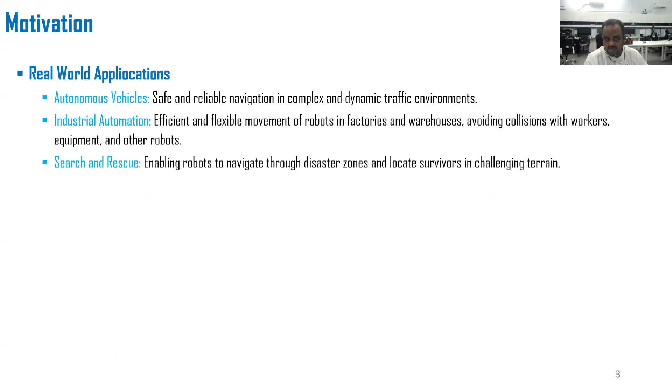So why do we need safety in robotics? In real-world applications, autonomous vehicles work in complex and dynamic traffic environments, so safety and reliability should be ensured in order to ensure mission success. Then comes industrial automation, where robots work in factories and warehouses. Then search and rescue, where we use ground, aerial, or underwater robots to navigate through disaster zones, gather information, and locate survivors. Finally, exploration and surveillance, where drones and robots are used to explore unknown areas, such as underwater or in space.

So what do we mean by safety in our work? Particularly, when we talk about safety, we want to refer to it as preventing collisions with humans, objects, or other robots. To ensure safe operation in various environments, we need certain policies and protocols built into the robot's computer system. This is needed to increase efficiency, so the robot can navigate smoothly without getting stuck or colliding with objects, and also to optimize robot paths for time and energy efficiency.

So even without this slide, it's not very difficult to understand that robot obstacle avoidance is very crucial for enabling robots to operate safely and effectively in real-world scenarios.

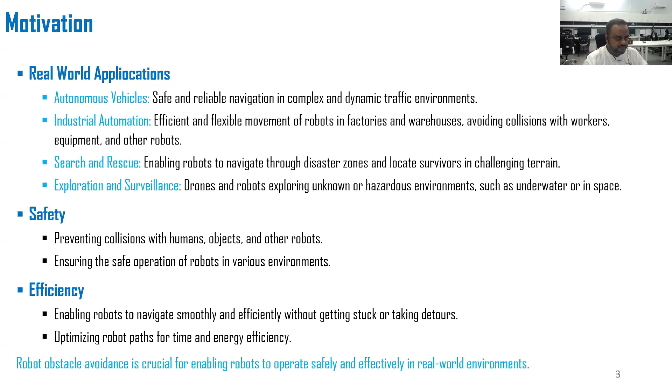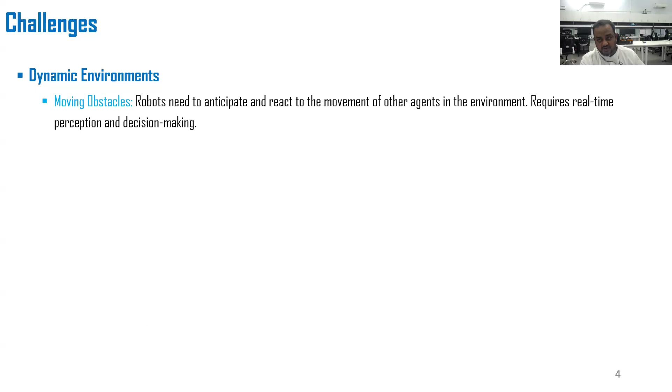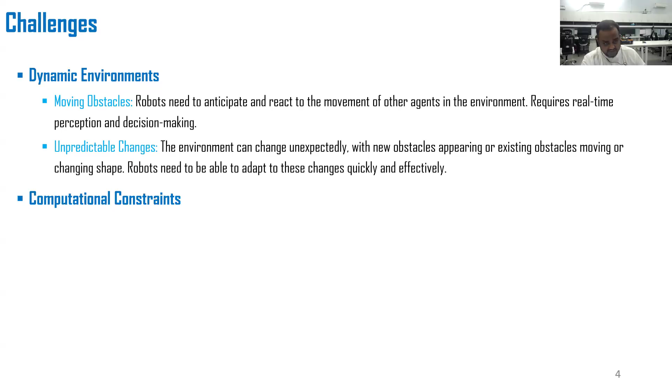When we talk about obstacle avoidance or safety in our work, there are certain challenges, like dynamic environments, where we get moving obstacles and we don't always know how they're moving. There are unpredictable changes in scenarios, like robots becoming rogue, moving quickly and unpredictably. There are computational constraints, where real-time processing is important and the robot should have sufficient computational resources onboard. Other challenges are uncertain and complex environments, varying obstacle shapes and sizes, sensor failures, or other unexpected events.

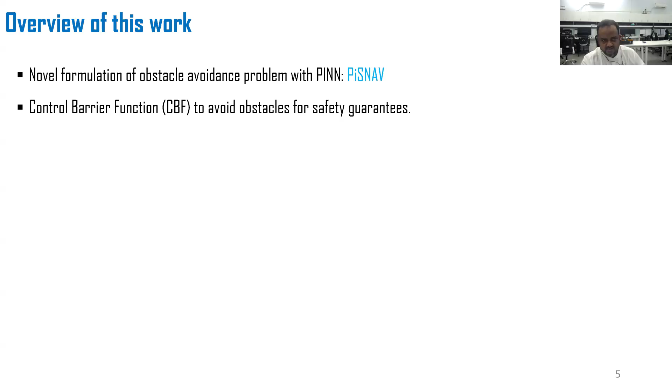So to summarize and address these challenges in this work, we talk about a novel formulation of the obstacle avoidance problem with physics-informed neural networks, which we call the PiSNAV algorithm. We use control barrier functions to avoid obstacles for safety guarantees. A control barrier function is a mathematical policy which can guarantee safety in certain environments, so we use that advantage.

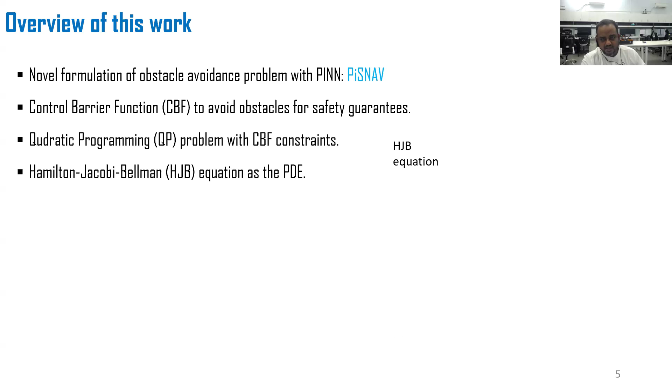When we talk about control barrier functions, quadratic programming comes into picture, where the control barrier function forms the constraints in the optimization. Then we convert the quadratic programming problem into the Hamilton-Jacobi-Bellman equation, which is actually a partial differential equation. This Hamilton-Jacobi equation is solved by the PiSNAV algorithm, and it gives the optimal maneuvering input to the autonomous vehicle. So in a bigger picture, if we see the autonomous vehicle system, it is something like this.

It has some actuators, some sensors. Sensors are like lidar, radar, sonar, etc., which can sense whether there is any object or obstacle in the environment. The sensor tells the decision-making system, flight controller, or robot controller unit whether there is a potential obstacle or not. If there is no obstacle, we use a proportional integral derivative controller so the robot can track the predefined trajectory or path and reach the goal. If there is an obstacle, we use the PiSNAV algorithm, and accordingly the control input is generated, which tells the actuator like propellers, motors, control surfaces to act so the autonomous vehicle can take an optimal and efficient maneuver.

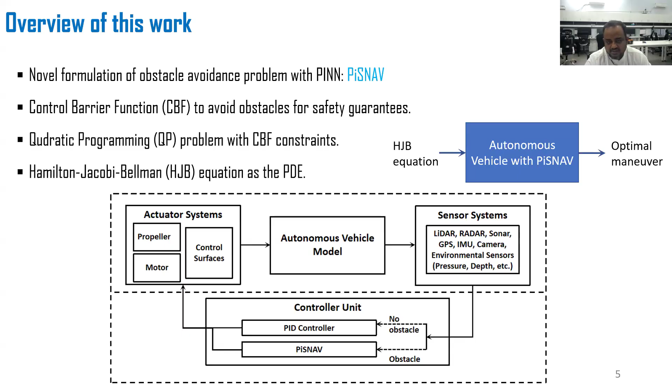To sense whether there is any obstacle or object in the system and to have perception about it, we can't deny the importance of sensors. So robots need to accurately perceive their environment, whether there are obstacles, and whether they are static or dynamic. The quality of obstacle avoidance depends heavily on the quality of the sensor data.

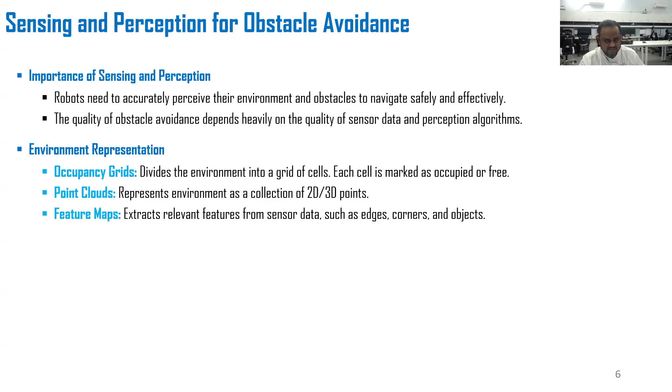The environment representation should be good enough for the robot. There are occupancy grids, where the environment is divided into different grid cells, each marked as occupied or free. There are point clouds, where we get the representation of the environment as a collection of 2D or 3D points. And there are feature maps, which extract relevant features from the sensor data, such as edges, corners, objects, etc. These are some representative figures where you can see the real world environment, which is a maze-like scenario, extracted as a feature map like this, an occupancy grid map like this, and this is a point cloud representation of some object or obstacle.

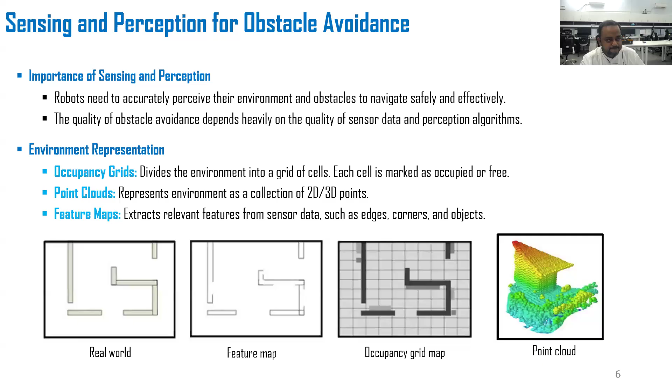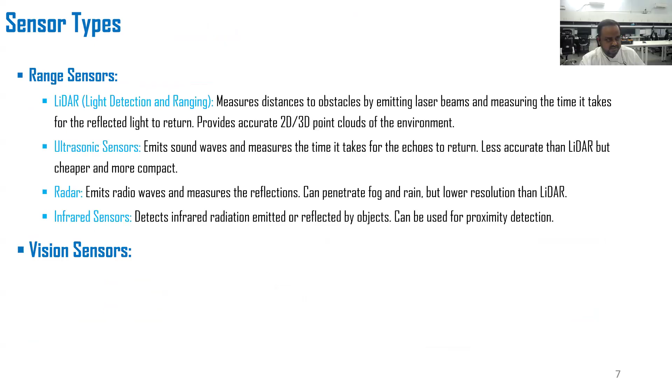There are different types of sensors used in our work. One is range sensors, with variations like lidar, ultrasonic sensors, radar, infrared sensors. Then there are vision-based sensors like camera, depth cameras, and stereo cameras. With these, the first part of the problem is solved - sensing the object or obstacle and having perception about it.

After that, there is decision making. So what is safety in our work? As I told, safety is collision avoidance or obstacle avoidance, a critical aspect of safety in robotics and unmanned systems that is always in discussion. It involves a combination of sensing, perception, planning, and then control.

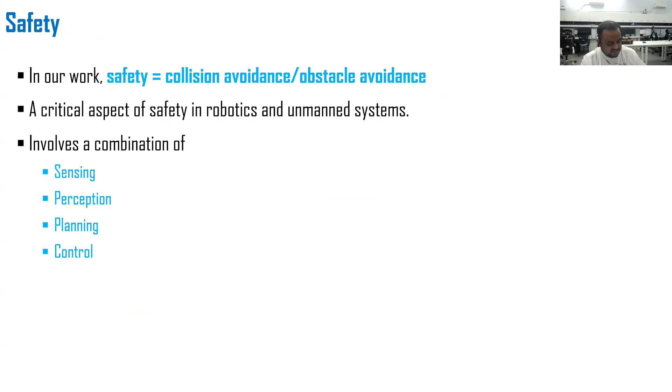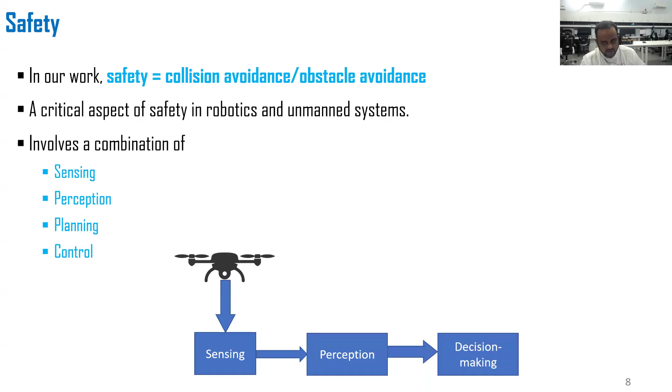When we want to see the picture in a schematic fashion, this is the vehicle which has a sensor built in, or added to the system. When it senses the object, there is a perception unit, then a decision-making block which decides whether we should consider it as a potential obstacle or not. If there is an obstacle, there is a chance of collision, so that should be eliminated. Then the flight controller decides how the control policy of the particular autonomous vehicle should be designed, after which the control and stabilization aspects are taken care of.

Then all these control input strategies go to the actuation block, and finally the actuation units, like the propellers, function in a specific way so the drone can take a specific turn to avoid the obstacles present in the environment. It can be static, it can be dynamic, and also it can be some other drones or robots in the environment.

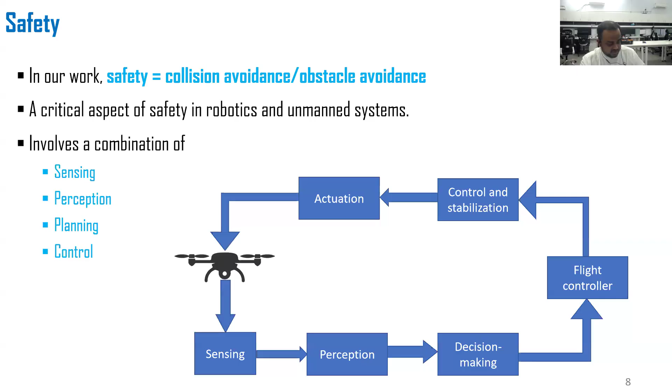As I told, control barrier function is the algorithm we are using for obstacle avoidance. It is a function that controls the autonomous vehicle's safety by defining barriers. The barrier divides safety such that it separates regions into safe and unsafe regions for the autonomous vehicle. I'll give one example.

Just assume you are flying kites on the terrace. What is the safe region and what is the unsafe region? The safe region is on the terrace, and if suddenly, without being mindful, you fall down from the terrace, then it becomes unsafe. So what is the barrier? The barrier is the parapet wall, which tells that inside that parapet wall, the region is safe for the kid flying the kite, and outside the barrier or parapet wall, it is unsafe. This is the basic concept of control barrier function.

In robotics, when we talk about the unsafe region, that is the obstacle or other autonomous vehicles, and when it is the safe region, it is the area excluding the obstacles. That means when a drone is flying in the environment and there is a building, then the building is the unsafe region for the drone.

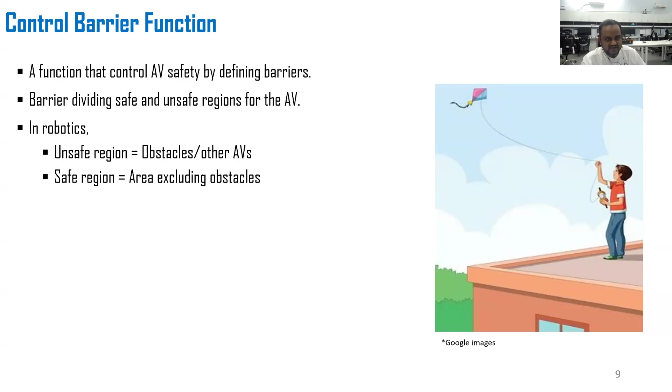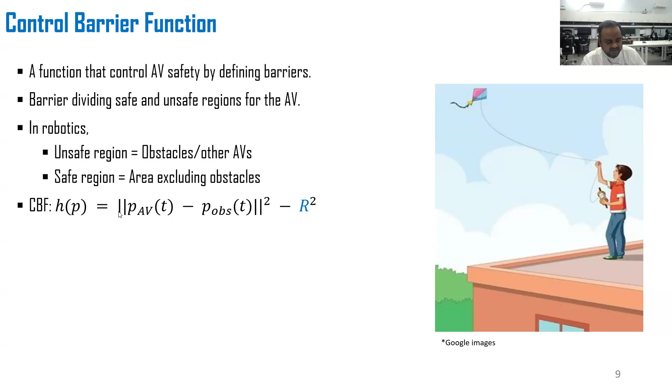Outside the building, whatever free space is available is the safe region for the drone. Control barrier function is a function depending on the states of the vehicle. It can be defined in different terms, but here we are defining it in terms of distance. What is happening here?

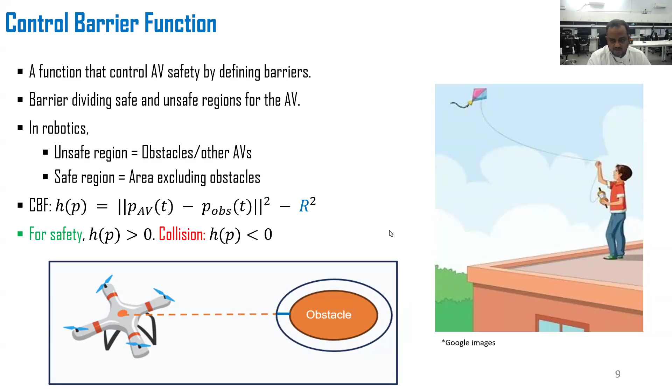To see a pictorial view of how the control barrier function will be decided in case of robotics, it is something like this. The drone comes into the environment and encounters one no-fly zone, obstacle, or unsafe set. Through its sensor, it maps the points on the boundary of the unsafe set.

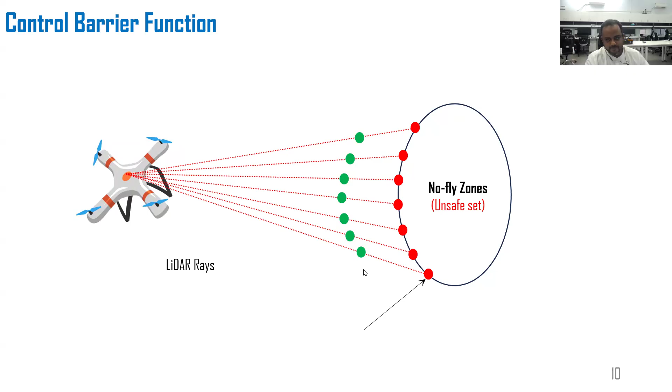Now the drone itself has a turning capability. It can't come very close to the red points and then start turning, because that will not be a successful maneuver and collision will happen. So based on the turning capability of the drone, there will be some safe points which form a kind of locus in the system, and we can say the drone should not cross these points. If it crosses these points, then even though it is aware of the presence of the obstacle, it will not be able to turn sufficiently to avoid it.

So these are some safe sample points we talk about. Till this point it is safe to maneuver without collision, and unsafe beyond this. Assume that these are the LiDAR rays, and these are the unsafe sample points, as I have told. Coming to this particular point is, of course, the collision, but depending on the physical dimension of the drone and its turning capability, it is also mandatory that the drone doesn't cross these safety points.

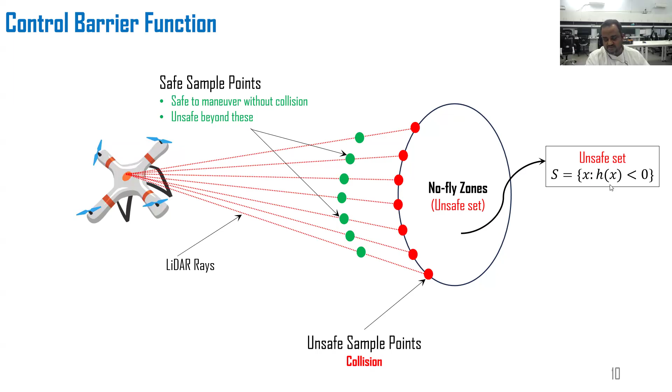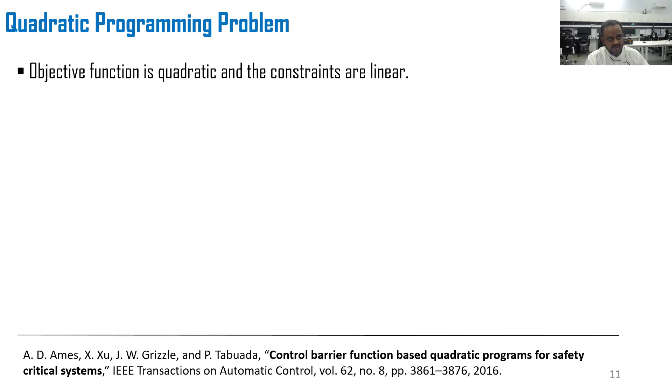So this no-fly zone or unsafe zone is characterized by the control barrier function, which becomes negative. Now, when we have the control barrier function in hand, the way problems are generally solved in robotics is that we use the control barrier function to create a constraint, and that constraint serves as a constraint in an optimization problem, which is a quadratic programming problem. For a quadratic programming problem, the objective function is quadratic and the constraints should be linear.

So in general, energy consumption optimization is considered, and an energy minimization problem for obstacle avoidance is considered here. The objective function is to minimize the energy, subject to the state equation of the system, or the autonomous vehicle, drone, or robot—I can use these terms interchangeably. And this particular constraint is the control barrier function based constraint.

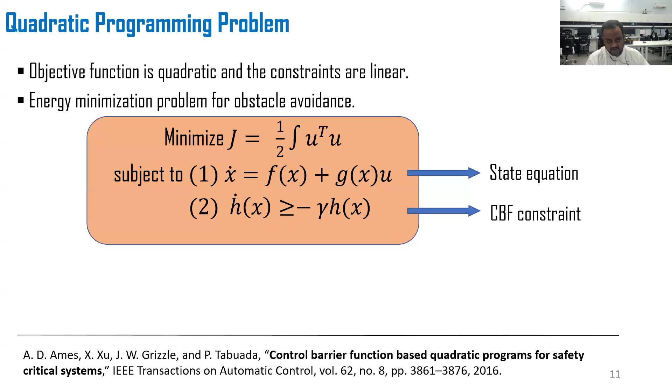So we need to solve this particular quadratic programming problem. We get U, which is the control input, that minimizes this objective function. And in order to maneuver in a minimum energy consumption way, that particular U should be utilized by the autonomous vehicle. X is the state vector, U is the input vector, and the control barrier function is already defined in the previous slides—based on distance. There can be angle-based control barrier functions also, but we are not considering those here.

The concept of control barrier function and quadratic programming problem, to solve that, was first conceptualized in this particular paper, 2016, by Ames.

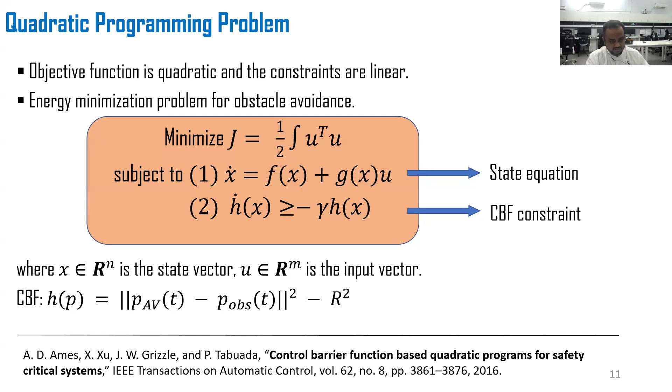Okay, up to this point, the problem is straightforward. We know there are obstacles in the environment, and we use control barrier functions to create constraints.

These constraints enable the drone to obey the safe and unsafe regions and boundaries. But after that, what we do in our work is convert this optimization problem into a Hamilton-Jacobi-Bellman equation, which is essentially a partial differential equation. Why do we do that? What's the advantage? It will be clear in later slides.

The Hamilton-Jacobi-Bellman equation is a PDE. It plays a central role in optimal control theory, providing necessary and sufficient conditions for optimality in continuous time dynamic systems. It helps find the best control strategy to minimize something—for our case, it is the energy.

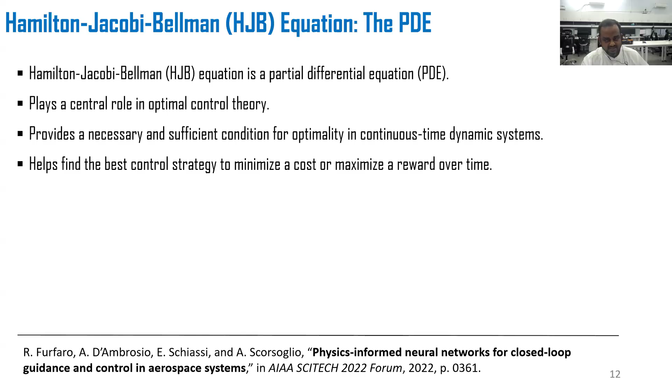When we break down the problem, we first get the optimal control problem from the previous slide's optimization problem. Then there is a value function involved. Out of that, we formulate the Hamilton-Jacobi-Bellman equation, and then we solve it using a physics-informed neural network.

Solving the optimal control problem with the Hamilton-Jacobi-Bellman equation and then with a physics-informed neural network was first conceptualized in this paper, which discussed optimal control systems, closed loop guidance, and control in aerospace systems using PINNs.

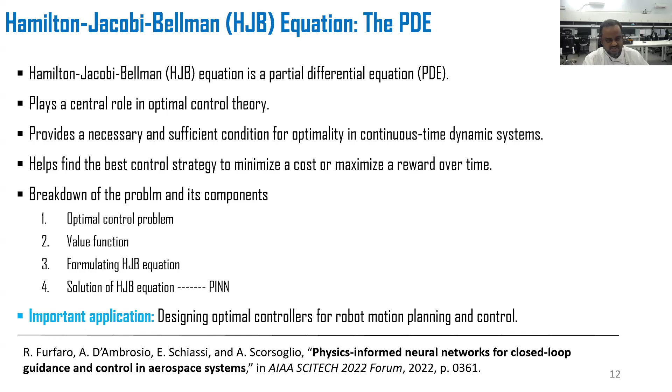The important application becomes designing optimal controllers for robot motion planning and control. We use this idea to convert the optimization problem into something solvable by physics-informed neural networks. There are lots of advantages which I'll show in the result section.

So what is our Hamilton-Jacobi-Bellman equation? The mathematical formulation is given in this particular paper by us. I won't go into detailed derivation, but I'll show the flow of how the problem is formulated. First we have the system equation—the dynamic or kinematic equation of the autonomous vehicle.

Then we have the control barrier function, and a control barrier function based constraint, which is standard and given in the ARTPARK paper. With all these, we get the quadratic programming problem. If we just solve this quadratic programming problem with some solver, we get the optimal control input U which minimizes the objective function.

But what we are doing here is defining a value function. Based on that, we get a Hamilton-Jacobi-Bellman equation, and finally we solve it for the optimal control input and get a final PDE for a point mass model.

We started with a point mass model to gain confidence in the algorithm, and then we started increasing the complexity of the model. So here, what we get as the final PDE is for a point mass model.

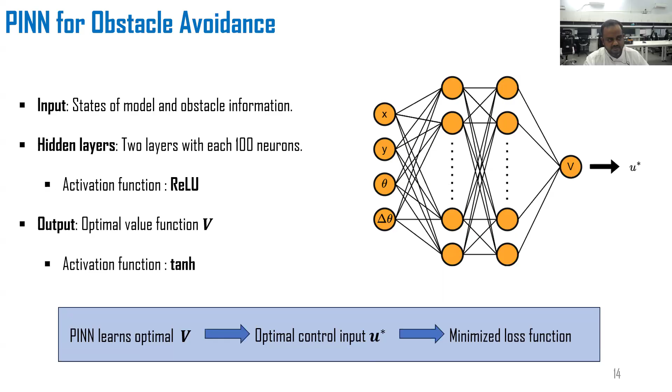So the obstacle is avoided. Also, if there's a probable collision with dynamic objects like a human being or something similar, that can also be avoided. Okay, so how do we train the model?

The goal of Latin hypercube sampling is to ensure the samples represent the full range of the input variable—meaning it doesn't give importance to certain portions while missing other areas. This is how the collocation points are generated.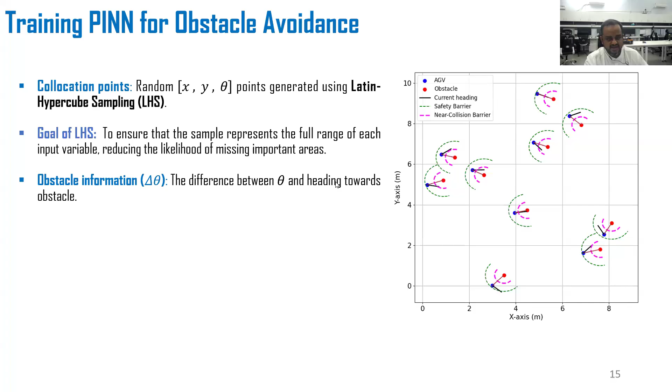Then the obstacle information is given in the difference between theta and the heading towards the obstacle. And if I generate one particular scenario to show how things are obeyed, it is something like this.

The autonomous vehicle is in an unsafe region because it has crossed the safety radius somehow, because of its high linear velocity or limited turning capability. So somehow it has crossed the particular safety barrier and gone inside that, but it should not cross the pink barrier, which is the near collision barrier. These two barriers depend on the dimension of the autonomous vehicle.

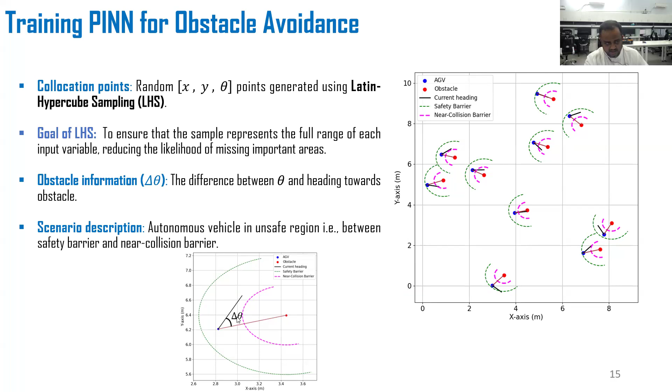And when you see this, this red line is the heading towards the particular obstacle, which should be avoided. So this del theta should increase. In this way, the network is trained.

The loss function is the PDE, which is to be solved. We train the network for 8,000 epochs, with a learning rate of 2e minus 4, and we use the Adam optimizer. After training, we see that the network is learning the policies sufficiently and the loss is coming down.

So with this particular model and some confidence with the point mass model, with the mathematical formulation of the Hamilton-Jacobi-Bellman equation, then getting the PDE, then training the network and getting the loss converging, we go for testing the results.

Can I ask a question, Rudrash? Sure, sir. It seems that you have the constraints. These are sort of soft constraints, like penalties. You didn't need to go to harder enforcement like augmented Lagrangian or similar.

So, sir, it was not required in enforcing that, but when we formulated the Hamilton-Jacobi-Bellman equation, we have a Lagrange multiplier, and based on that, the PDE is formulated. But we are not enforcing any condition based on that.

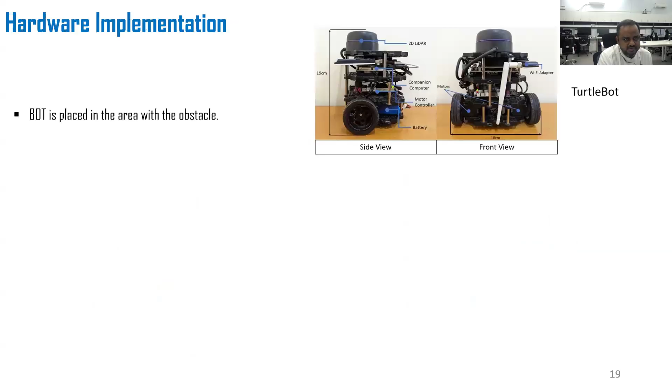So the bot is placed in the area with the obstacle. The obstacle should be on the path of the TurtleBot. The companion computer reads the LiDAR data, and then obstacle distance, obstacle coordinates, all these things are obtained.

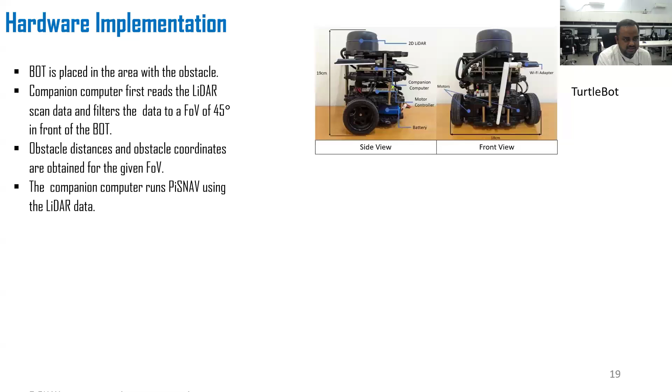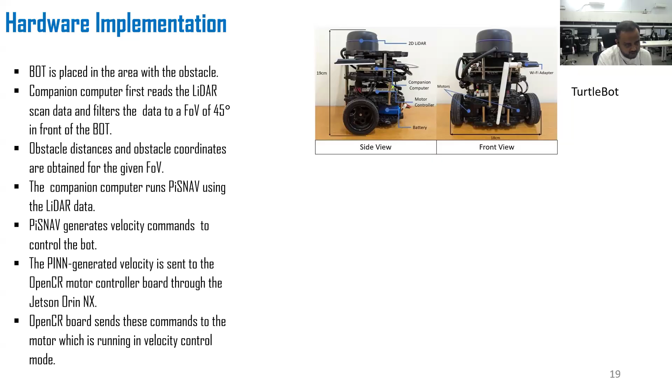Then the PiSNAV algorithm uses the LiDAR data. PiSNAV generates the velocity commands to control the bot, that is the U star. Then the PiSNAV generated velocity is sent to the controller. Based on that, the command goes to the motor, which is the actuator, and then finally the maneuver takes place.

So you can see there is a single obstacle scenario where the robot was moving in a straight line and suddenly it encounters an obstacle and then maneuvers. Then this is a multi-obstacle scenario. In this particular scenario, we don't have any proper goal location, it is just exploring and avoiding the obstacles, and that is what is expected from the vehicle.

Then finally, we tested one random obstacle scenario where we drop the obstacle in front of the moving bot, and it stops and starts changing its heading.

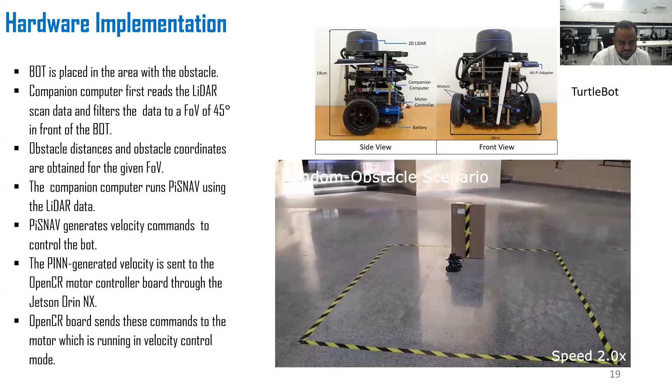So when we talk about ground vehicles, we have the motion of the vehicle in the X and Y coordinate. But after formulating the first problem in a point mass system, we wanted to see what happens if there is a movement in the vertical direction.

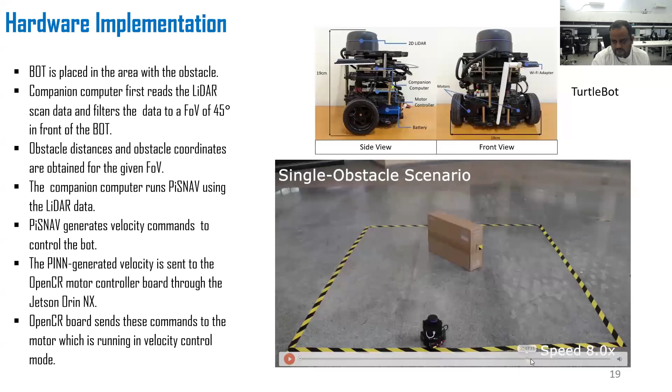Yes, excuse me, can I ask a question? I'm Kamal from Brown. In the previous slide, when you put an additional obstacle in a dynamic way, does it check the minimum distance to travel or the minimum time? Is it the last case? Yeah, last case. Please ask me the question once again.

So is it checking what will be the minimum distance to travel, or the minimum time to reach the destination? For this particular scenario, the dimensions are such that when it is dropped, it is sufficiently far. I'll show you other simulations where if the velocity of the obstacle is too high, there are certain problems. This is common in robotic environments, because if the obstacle's velocity is very high or it comes in very close vicinity, the turning capability of the robot might not be sufficient and collision might happen. But that is a special case.

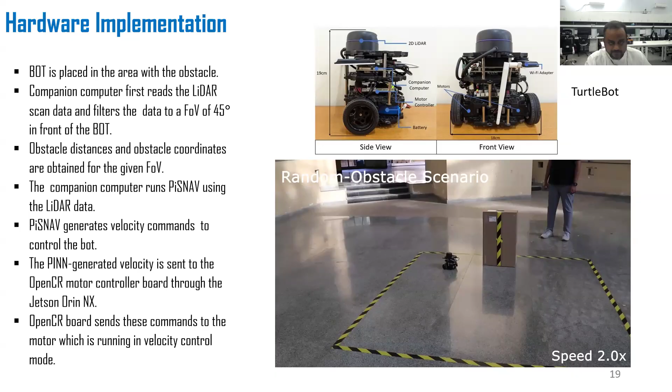But in the next scenario, for other things like when we have to track one predefined trajectory, then we need another additional controller, that is PID control. So that effect will be seen in this particular results experiment.

So here we take underwater vehicles, and this is also just a numerical simulation. The AUV explores the maritime environment in the heave motion, that is vertical motion. In the absence of obstacles, depth is controlled using a conventional PID controller. But when avoidance should be done, onboard sensors tell the vehicle controller that there are obstacles in picture and it should be avoided. To avoid the obstacles, it will deviate from the intended path with the help of the PiSNAV algorithm. You can see in the first figure the underwater vehicle starts from this particular starting position.

The mission it needs to conduct is to come down to a certain depth and then monitor the area, that is the plan. There is a predefined trajectory, the red one, the reference trajectory, and PID control helps the vehicle come down, follow the trajectory, and move in a particular fashion. But at this point there is one obstacle, so PiSNAV comes into picture. The PINN trajectory is this green one. By doing this it avoids the particular obstacle, then comes back to the PID trajectory, the reference trajectory, and tracks it again by the PID controller. So it is a kind of switching control between PiSNAV and PID control.

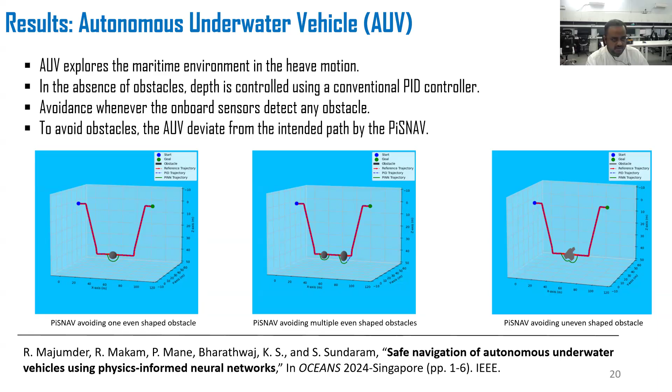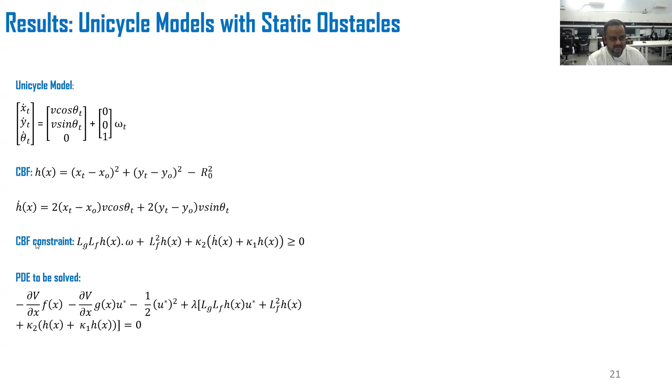So we came back to the ground vehicle and made the vehicle model a bit more complicated than the point mass model. Now we check results with unicycle models. This is the equation, this is the control barrier function I mentioned earlier. Then the CBF constraint is formulated, and finally we formulate the PDE to be solved, and in the environment we keep multiple obstacles.

So this is a ground vehicle simulation where the vehicle starts from this blue point, and this is the goal location. Now we have the goal and we want to send the vehicle from the starting location to this point, somewhere in this region it should reach. Not for all obstacles have I shown the barrier, because that makes the figure cluttered. So for this particular obstacle, this is the safety barrier, and then we have one near collision area.

When we see the dotted lines, these dotted lines are PID control, because starting from here it needs to follow a reference trajectory and reach the goal location. But when it encounters the obstacles, it starts deviating using PiSNAV. This deviation happens whenever it encounters any obstacles. Finally, when there are no obstacles in the environment, like in the LiDAR data, when it sees that no point clouds are seen for the obstacles, then it switches back to the PID trajectory and reaches the goal point.

Okay, so this is the unicycle model with the PiSNAV algorithm for static obstacles.

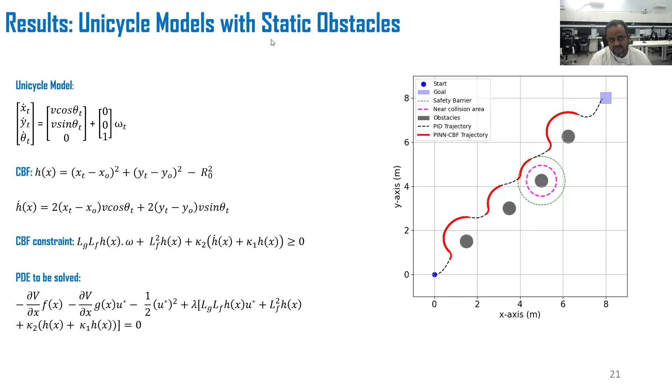Then we show the results of the unicycle model with dynamic obstacles, which is another level of complication. What we do here: we set the vehicle velocity as 1 meter per second, obstacle velocity as 0.5 meter per second, obstacle radius as 1 meter, and this is the barrier radius.

So the first figure shows the vehicle trajectory. Let me tell you that obstacle 1 is moving in a simple harmonic motion, so the center of the obstacle can go from point 4,4 to 2,6 and 6,2. First the vehicle starts moving and encounters this particular obstacle, avoids it. Then, when it is moving in this region, it encounters another obstacle which is moving in the negative X direction.

It avoids that also and reaches the goal. In the second figure, we see that the separation distance is always non-zero, meaning collision is not happening. The black line shows that before 14.57 seconds it encounters only the blue obstacle, and after that it is of no interest. After 14.5 seconds, it encounters the second obstacle, and it avoids that also successfully. If we see the video, you can feel the trajectory.

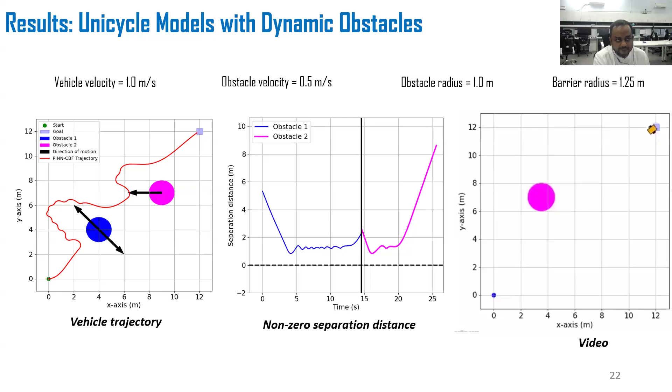After we saw that it was working for static obstacles and dynamic obstacles, and had some confidence from hardware experiments, we thought it was time to compare with other algorithms, because PiSNAV, which is based on PINN, is working, but is it working better than other algorithms? That is something which we wanted to figure out.

So first we took artificial potential field-based obstacle avoidance. We fixed one environment, which is a cluttered environment, and it is expected that the vehicle will start from this point and reach the goal location, with the environment cluttered by multiple obstacles. They are not arranged in a straight line, they are not arranged in an even order.

Then we thought, fine, APF can fail because of different reasons, since it has certain limitations, but does the control barrier function, which has a safety guarantee, work? So we are solving the control barrier function with the Hamilton-Jacobi-Bellman equation and PINN, but we can also solve the control barrier function, or the quadratic programming problem, directly by a solver. How does that work? We see that it is avoiding the obstacles.

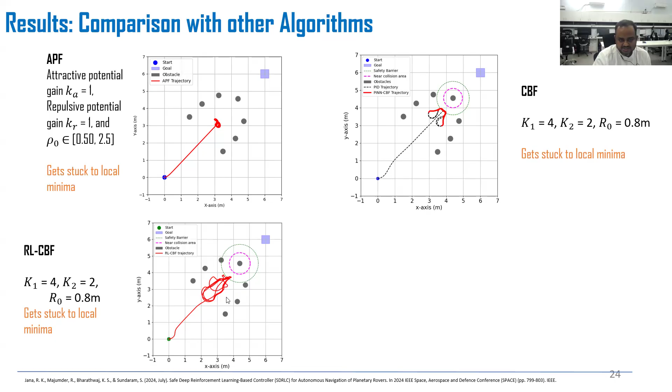Okay, we consider control barrier function. We see the same scenario that it gets stuck to local minimum. We compare with our own algorithm, RL-CBF, we see that it gets stuck to local minimum. So even like it is worse, it is traveling a lot inside, which is energy consuming, but it is not reaching the goal. Whereas when we see PiSNAV, we see with the same parameter values, it is successfully avoiding. So that is the finding which tells us that, yeah, PiSNAV we can believe on. And in this kind of scenario where there is a trend that many algorithms get stuck, this is not getting stuck.

So if you just see these two figures, right hand side, this is the control barrier function which is directly getting solved. But the problem is that the quadratic programming problem is time consuming, and when it gets different obstacles, every time it encounters one obstacle, it needs to solve the quadratic programming problem. So the time is increasing in the previous slide.

Okay, but here, when the obstacles are arranged in a very specific way, it is getting stuck. But in case of PiSNAV, in the previous environment, if we see, it was, wait, let's go here. Since the network is being trained with how it will treat the obstacles, how it needs to formulate the control barrier function, how to solve and all, being trained, the network takes less time to avoid the obstacles and reach the goal. So that is the success of PiSNAV.

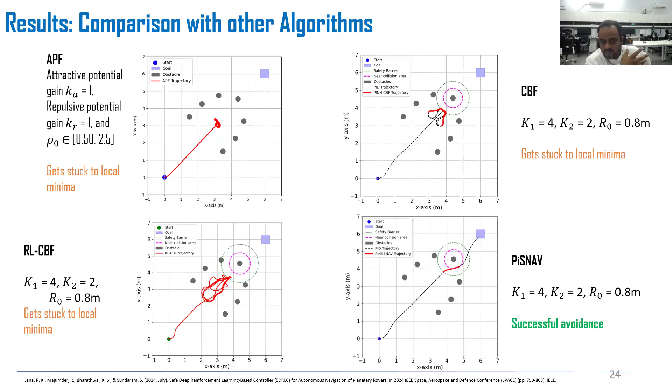So when we compared the PiSNAV algorithm with some state-of-the-art and very classic algorithms, which are often used in robotic literature for obstacle avoidance, we see that PiSNAV is sometimes working better and sometimes it is working way better when the others are failing.

Okay, so with that, now we go for a hardware experiment where we create the similar environment, what I was showing in the simulation. We create a 6x6 meter grid. We measure the area, it will not be visible. The markers are there to exactly plot the area here in the particular arena. Then we have a ground vehicle, which we use as a Volta robot. If you can see, it is just behind me, this Volta robot. It has this following dimension, then these controllers, then onboard computers.

We use RP lidar, which is a 2D lidar. Since it is a 2D lidar, we see the point clouds like this. You can see when it is 3D, the point cloud will become 3D, but being 2D lidar, it will give something like a semicircle because of these cylindrical obstacles.

Then wheel encoders are used for the Volta to provide the real odometry values, that means X and Y positions. Then point cloud of the obstacles, when it is found in the sensing range of the lidar, it is considered as obstacle. And then finally, the vehicle solves the problem, which is the PiSNAV algorithm, and then avoids in real life.

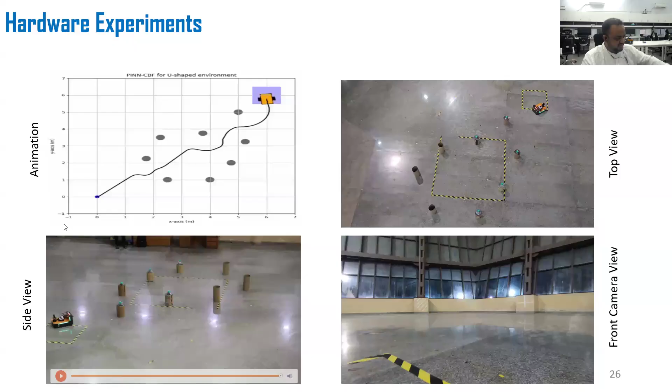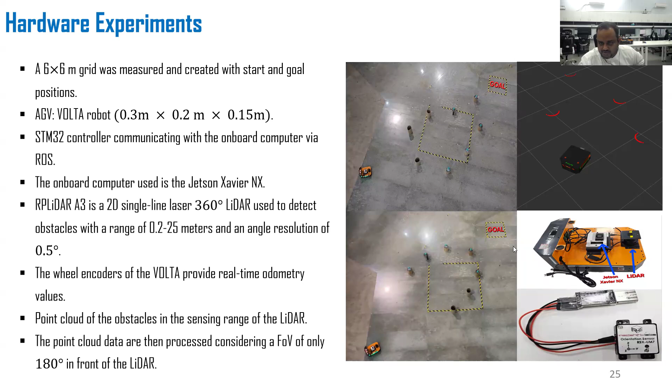Really? What kind of computer do you have? If I go back, you see that we are using this particular onboard computer, which is Jetson Xavier NX. And in this particular environment, it is taking around 50 seconds or something like that to cover through the environment.

So the path is not communicated, the testing part or execution part is fully onboard. So it cannot go really fast, that is the limitation of the bot also. It can't go that fast compared to a drone or something like that. Currently, we are trying to formulate this problem with a drone model also.

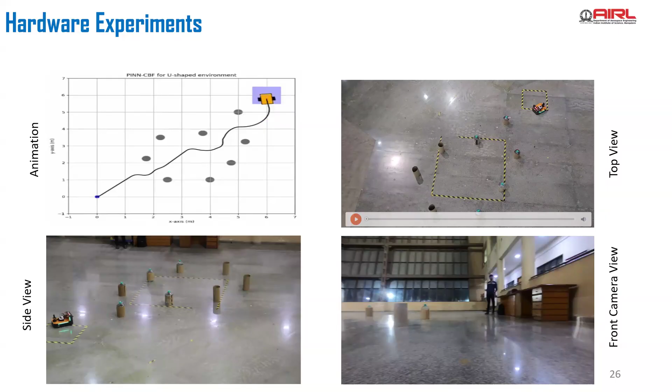So I thought NVIDIA has these new mini Blackwells that are extremely fast. Probably we can see the possibilities of how the results change for edge computing. Then we have a similar scenario here,

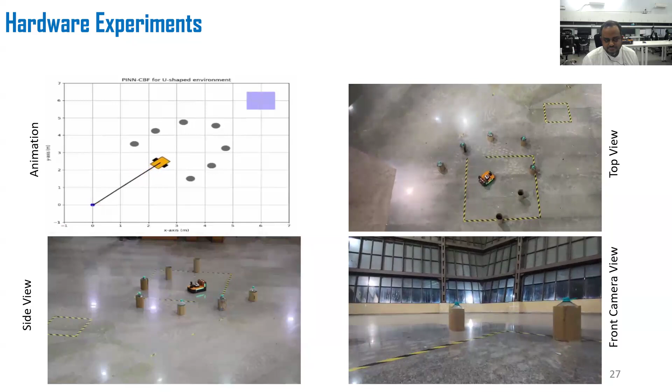where you can see the same environment, like the U-shaped environment. It reaches the goal. So the goal is marked as a region, not a particular point. Once it reaches that particular area, it is fine, we are satisfied that it has reached the goal.

It's a bit overly conservative, maybe because of the way you draw the CBF. Yeah, it's a little conservative, it turns way before the obstacle. That is happening because it is sensing way before, and then the radius is also there.

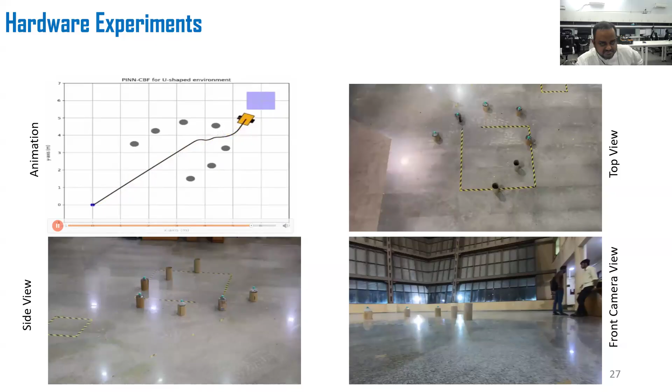So why is it rotating much before? That is because of the size of the bot. Based on that, the barriers are created and it is expected to obey all these barriers. Yeah, better safe than sorry.

I had a small question - if this is Varun from Round - so I was wondering if the initial direction that you provide has an impact on the algorithm's performance. Not in that way. The initial direction is provided to reach the goal, which is essentially a straight line. A PID controller will help it reach the goal in a straight line. So it happens mostly when it sees any obstacle on its path, then it starts changing.

If I don't have a straight line to start off with, will it figure out the scenario? The scenario might change, but we haven't studied all this because this is the simplest application where we need to send it in a logistic application or something like that. We need to cover the shortest path also.

So if we want to send the drone in different other curved paths or something like that, then the purpose also should be clear. Okay, so your objective is shortest path, not shortest time as such. Okay, thanks. When it is exploring certain areas, like for underwater vehicles, it might need to explore different areas, monitor, collect data, then it might require taking some other path, but that is not required here.

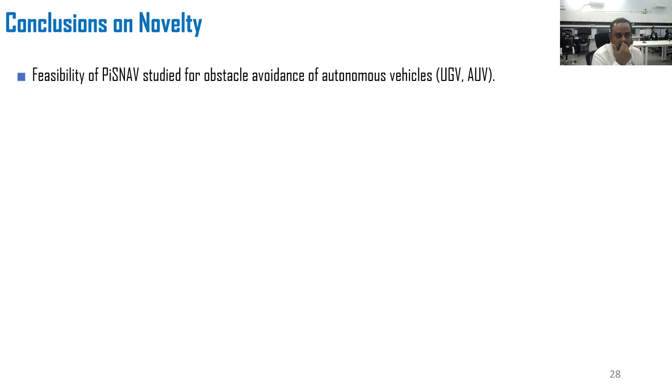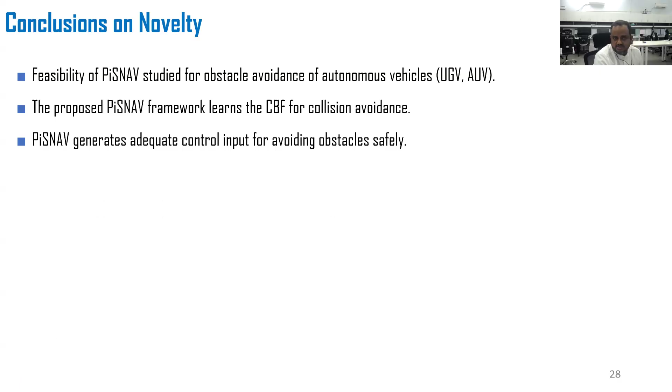So I conclude my study with whatever we have done with physics-informed neural networks. We check the feasibility of PiSNAV for obstacle avoidance of autonomous vehicles. As of now, we have tried it for ground vehicles, UGV, and underwater vehicles, AUV. The proposed PiSNAV framework learns the control barrier function for collision avoidance, generating adequate control input for avoiding obstacles safely. It solves the QP problem as a Hamilton-Jacobi-Bellman equation, which is computationally less intensive - you have seen it takes less time than the other algorithms.

Also, it is never stuck in a local minimum. PiSNAV is scalable to multiple obstacles and can handle dynamic obstacles, but there is a speed requirement, because if the dynamic obstacle is too fast, and the robot is not a very high-speed vehicle, there might be some problem which we haven't tested, but intuitively collision might happen there. Upcoming work includes incorporating PiSNAV for UAV obstacle avoidance and incorporating a time-varying control barrier function to handle dynamic obstacles - currently it's formulated based only on distance, but we plan to extend the work in this direction.

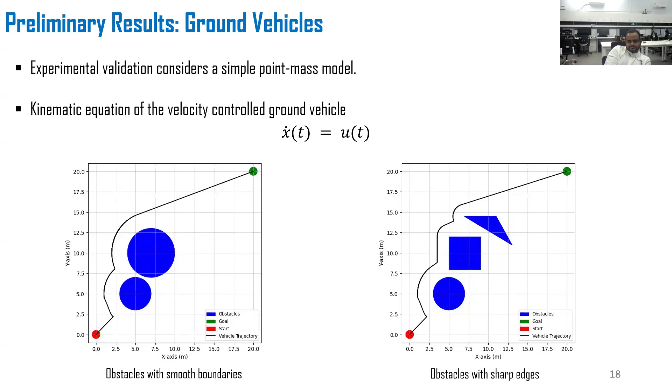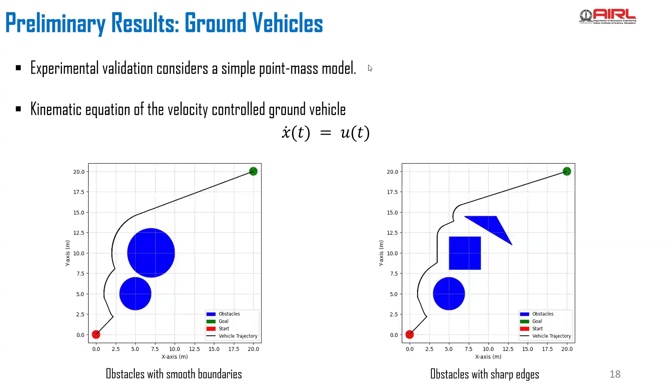Normally in robotics, people can model it by, instead of using Euclidean space, modeling it in a Lie group, so that states and controls are in a matrix space, which models the angles and the turns. I don't know if that's okay. Never mind. Thank you for your clarifications.

Maybe we should move to the second talk because Andreas is already here. Rudrashis, thank you so much for your wonderful presentation, and thank you for staying. Thanks, George. Andreas, you are here, thanks Professor, are you George? Thank you very much, Andreas. Very interesting, thank you.

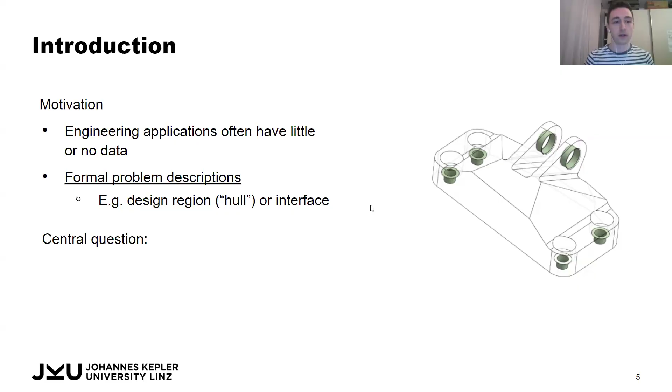All right, geometry-informed neural networks. The main motivation is that in engineering applications, often we have little or no data available, but formal problem descriptions exist, and we would like to leverage them. For this example, imagine this is not a shape we want to optimize, but a design region—the region that a shape shall be in. These green round shapes here are the interfaces where a shape should attach. We will see more examples later. These are formal problem descriptions, and we would like to leverage them. The central question of geometry-informed neural networks was: is it possible to train a shape generative model on objectives and constraints alone, without relying on any data? There is really an analogy to PINNs here.

So with GINNs, we have three central questions: how to represent the shapes...

So there we are in this regime of neural fields, implicit neural surfaces, implicit neural shapes. And PINNs can also be viewed in that aspect, but also conditional neural fields that we have in generative modeling. How to enforce the constraints?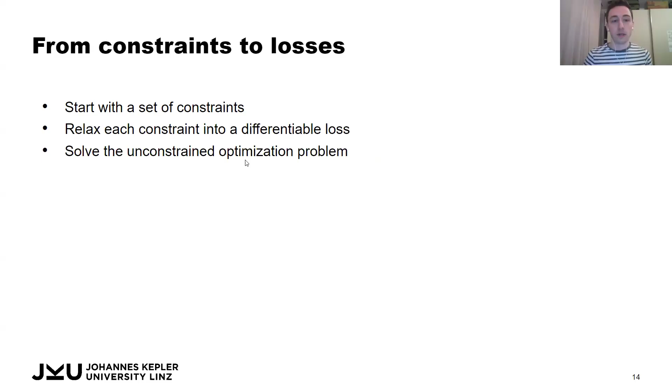And how do we come now from constraints to losses? If we start with a set of constraints, we relax these constraints into differentiable losses and solve an unconstrained optimization problem. So let's take a look at this example again.

We have a design region, so it should really be within this box, or this shape defined by the mesh. So we want the shape Omega to be contained within this design region Epsilon.

So how can we make this into a function constraint? It basically means that for all points outside of this design region, the function f of x should be greater than 0. So that means there is no shape that is really outside. I hope this intuitively makes sense.

This is the function constraint on the signed distance function. And the loss for this is: if we sample different points outside, and if there is a point that is negative, which would mean there is a shape there, then we want to penalize this and actually make it positive.

Similarly, for the interface, we want the boundary of the shape attached to these interfaces. So we want to enforce that the function value at these interface points is 0, and we can directly enforce this with the loss. There are different ways, different losses or different constraints, and overall we have up to 6 or 7 constraints that we formulate and optimize for.

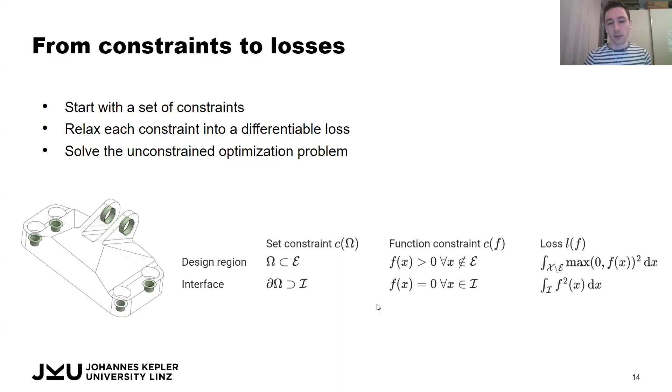One important constraint was also the connectedness constraint. Some of you might be familiar with Morse theory. I'm definitely not an expert on this, but we dug somewhat into it during this work.

One observation or result of Morse theory is that the topology of a sub-level set changes at critical points. So when we have this signed distance function and we increase the level set, suddenly these two disconnected components merge together into one. Similarly, the topology changes here, there is a hole, and at this critical point the topology changes, also with this example.

Just to give you an intuition: if we wanted to form a single connected component out of these two shapes at a certain level set, let's say here, then we would have to push the function value down. So we would have to change our neural network weights such that the value at this point moves down, and then we can connect these two shapes up.

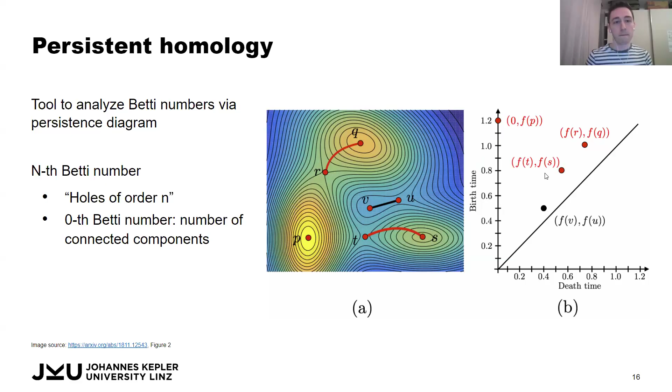Our biggest experiment is on 3D, where we optimize this jet engine bracket that you already saw before. So now if we add one constraint after the other, we can see how these shapes become better and nicer with more constraints.

If we just put the design region constraint, we can see that there are some blobs in this design region, but the constraint is fulfilled. It's fulfilled, but not very useful.

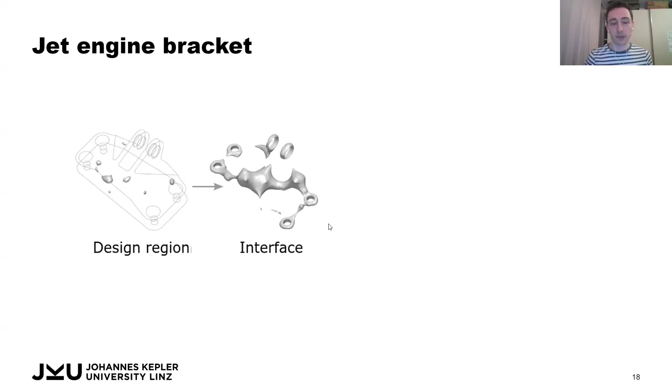When we add an interface constraint, the shape already looks more like an actual jet engine bracket. When we add connectedness, it looks better, but it's too wavy. Then with the smoothness constraint, it really looks like something that could be a mechanical engineering part.

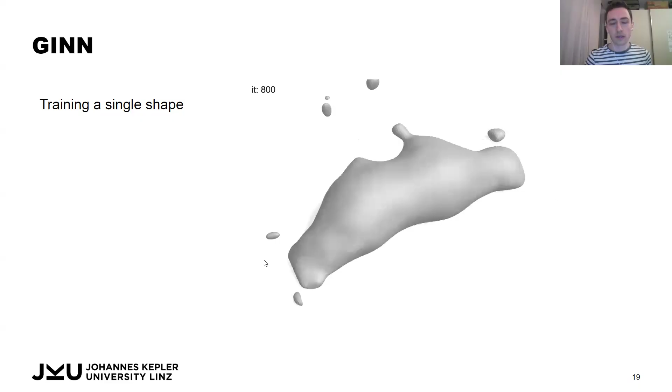This is an animation of how a single shape is trained, up to 4,000 iterations. I think this takes roughly 10 minutes or so to train on a small GPU. It needs maybe 1 to 2 gigabytes of VRAM, but that's enough.

Now what we tried was what happens without any diversity constraint, just using the geometric constraints we had before, with a conditional neural field. So we put in coordinates and modulation, and learn the shapes. We really see that this suffers from mode collapse.

So how do we introduce diversity? This was extremely interesting for us because we started with smaller experiments on this horseshoe example. There's some very nice literature on entropy and diversity from Tom Leinster, which I can really recommend, it's a great read. He and prior works also mathematically rigorously derived how to measure diversity.

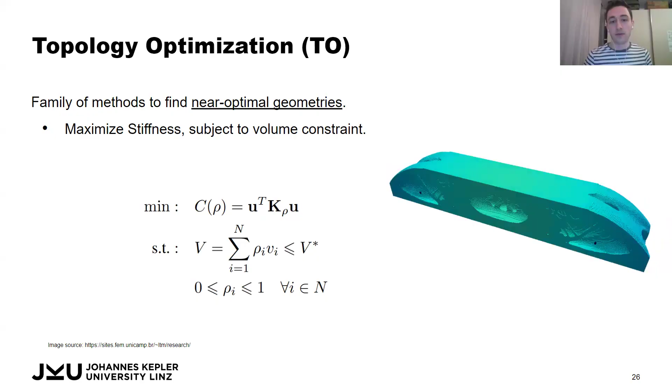So what is our motivation behind this? The problem with classical topology optimization, with most methods, is that they usually produce only a single shape. But multiple diverse solutions are desired because often aesthetics or manufacturability are hard to define and hence hard to optimize for—give me a loss function for making something beautiful, and that's somewhat hard. Maybe smoothness goes in the right direction, since most people prefer smooth shapes, but it's really hard to define. So the motivation is that if we produce many different results, a practitioner can select the one that is best looking or easiest to manufacture.

The central question we asked was how to obtain diverse, near-optimal solutions to a given topology optimization problem. The approach we took was to use a finite element solver in the loop to obtain stiffness gradients, and also add a diversity constraint based on the chamfer discrepancy.

So this is the overall view of the method. Again, we have a conditional neural field with coordinate modulation. We produce several different shapes.

Here we don't use a signed distance function representation, but a density representation. I'll spare you the details, but it's similar, except it doesn't map to real numbers, but to numbers between 0 and 1. It basically says whether there is a shape or not—gives you the density. If it's 0, there is basically no shape.

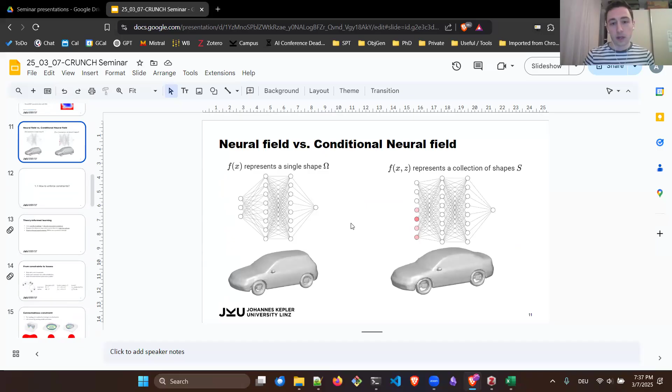The way we do it is we use this conditional neural field, and we sample—let's say in one iteration of neural network updates—9 different modulation vectors and also different coordinates, and pass them through. So we train 9 different shapes at the same time, passing them forward simultaneously, and then we repel them from each other.

Since these modulation vectors are sampled according to a uniform distribution, if you train it long enough, you kind of sample the whole space. Can you say a little more about this modulation space? You said uniform distribution, but you still have to stay around a mean, right? So how do you construct exactly these vectors, the modulation vectors?

We suspect this actually helps the structured latent space. We define a rectangular modulation space, let's say between 0 and 1, but in 2 dimensions, like a square, and then we sample uniformly in there. Does it make sense?

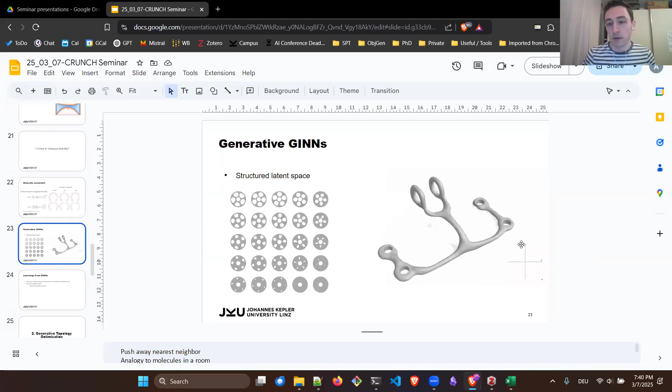It's an interesting question, this hypercube idea, because for hypercubes there's this diagonal. We suspect that if we had not taken a square to sample from, but just a sphere, we might not see this extremely nice structure, because you really try, along the main diagonals, to make the biggest changes, the biggest diversity. We think this really helps that it's a square, but we didn't really do any experiments on it.

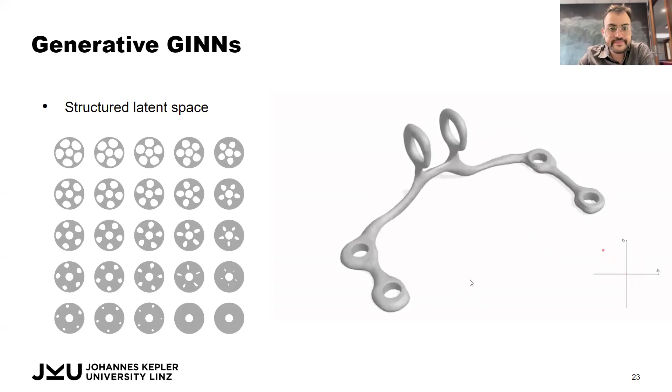Do we have any other questions? So I have one more question. You're looking at the last example on stiffness, right? But imagine you're looking at thermal stresses, and you have a time-dependent temperature profile, which gives you a time-dependent thermal stress field, and you want to be below a certain yield threshold. So if I'm bringing in something that depends on time, like cyclic or thermal loading, what happens in that case? You don't have a static design anymore, you have to have the full time-dependent profile for each case, right?

It's a good question. If we do topology optimization on this, I guess we'd still want to be stable to the most detrimental case, the one that's most damaging, probably the hottest temperature spikes or something. So this could be one way to model it.

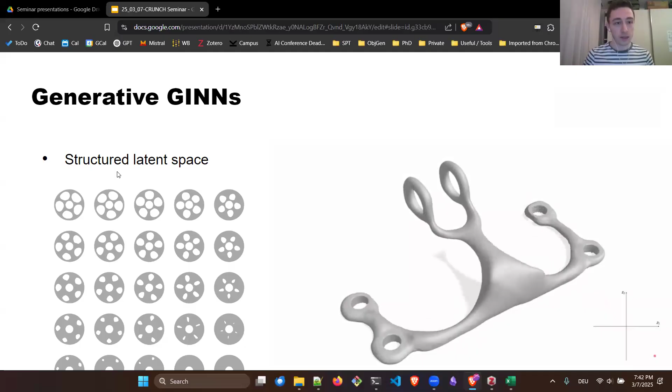But if it's time dependent, I'm not really sure how we'd do this out of the box. We had a master student who made certain constraints varying, which could be viewed as changing over time. There are different techniques for that. Instead of having a modulation space, you'd have additional inputs that define the time dependence, like you need to condition on time, and then you could probably model it. But I'd have to think it through thoroughly, and we could follow up if you're interested.

Oh, it's fine, it's a tough problem.